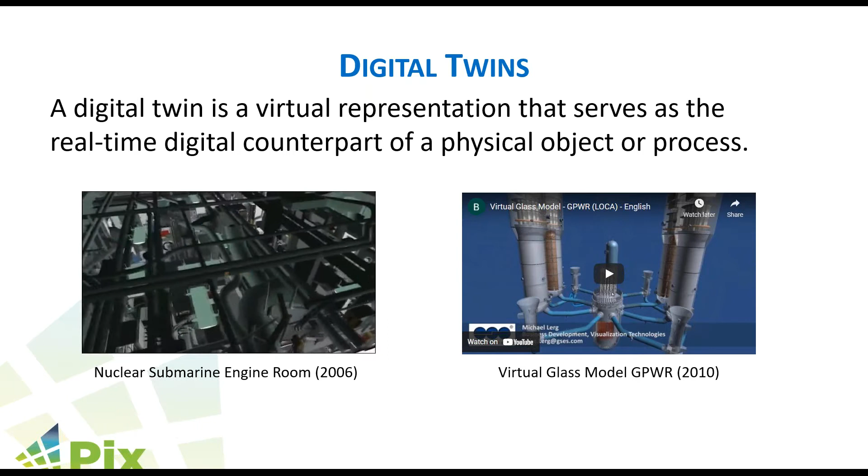Another aspect here is this glass model, called a glass model of a nuclear reactor. So you have the reactor core in the center and what's called 4 steam generators are these columns. These are the temperature gradients along the path coming from the steam generator, creating the steam that then goes to the electrical generation systems in another building, and then cooling off and going back to the reactor.

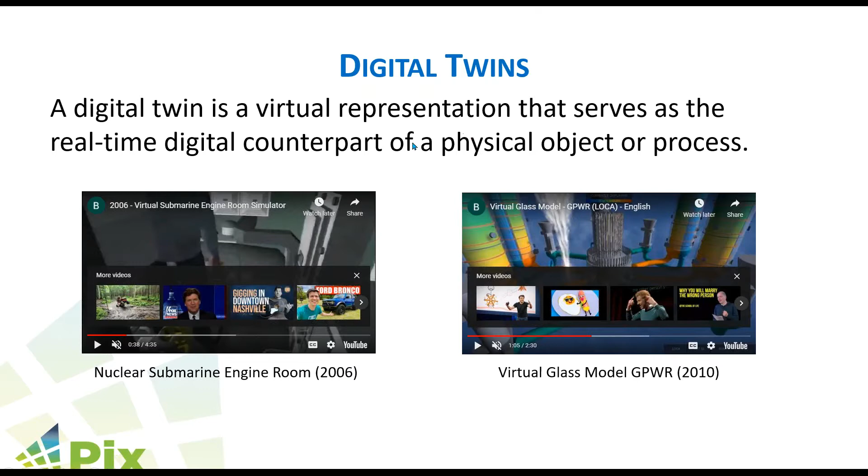We're able to trigger what's called a LOCA, loss of coolant accident, where steam is leaking out of a major pipe, and the temperature gradients were responding in real time, so you could actually visualize what was happening. But again, this is back in 2006, 2010. And although the term digital twin was coined back in the 60s and used by NASA for the Apollo missions and such, it really wasn't adopted by industries until more recently.

So we see that there are 4 stages of digital twins. The first 2 being collection and monitoring, with the digital twins representing a connection between the physical object and the data itself from the site and the sensors, for example, heating systems, thermostats, locks, lights, things like that. Monitoring then keeps track of that data by being able to visualize that data and see where problems occur within a building.

Further, taking it to the next step is doing simulation and optimizations. Once the data is collected, when you apply artificial intelligence or machine learning, especially within a 3D virtual model, we can then visualize how things are changing and do predictive analysis of where a system may fail down the road, given a history or trend. So you can actually predict when a certain system may have problems, either due to current data or historical data.

And then in terms of optimizations, we can also use simulations to make changes to real estate, doing design optimizations, eliminating factors causing deterioration, or changing energy intensive systems for more sustainable variants, and running what-if scenarios along those lines.

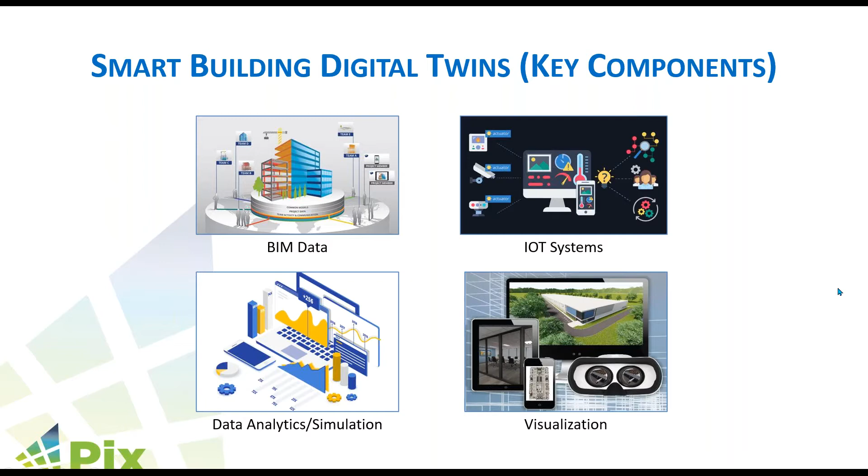Some of the benefits of digital twins for the commercial real estate market tie into optimization of the design and development process, doing what-if scenarios, getting through design and approval, getting permits, and things like that. There's increased data visualization to speed up decision making, reduced maintenance costs which is one of eProperty Care's strengths, access to maintenance logs and procedures, and increased tenant satisfaction by getting to problems more quickly, which reduces maintenance time and costs.

It optimizes property and asset management, especially if you have multiple buildings and multiple digital twins. You can then see how something affecting one building may eventually impact other buildings, especially if they're similar buildings on the same site, making the building more suitable to the tenants and the community at large.

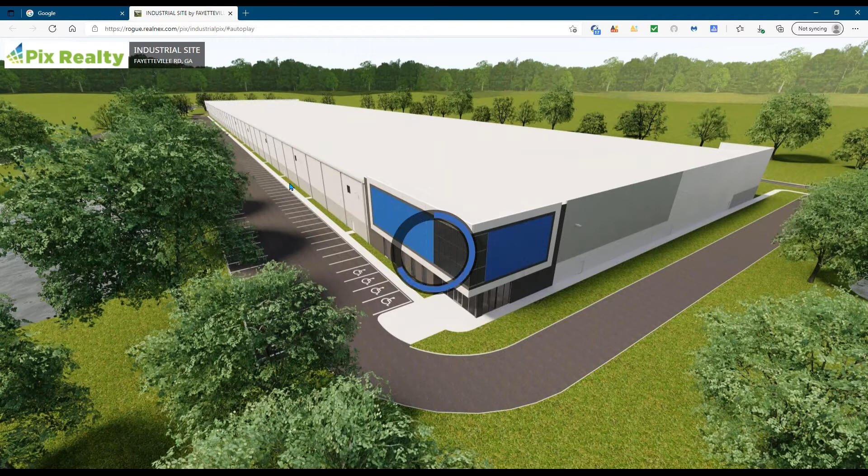So in this particular example of a digital twin used for design and visualization, we have...

Hey Mike, we're gonna have to mute something back there, there's some road noise I think. Yep, I just muted Charles temporarily. Gotcha.

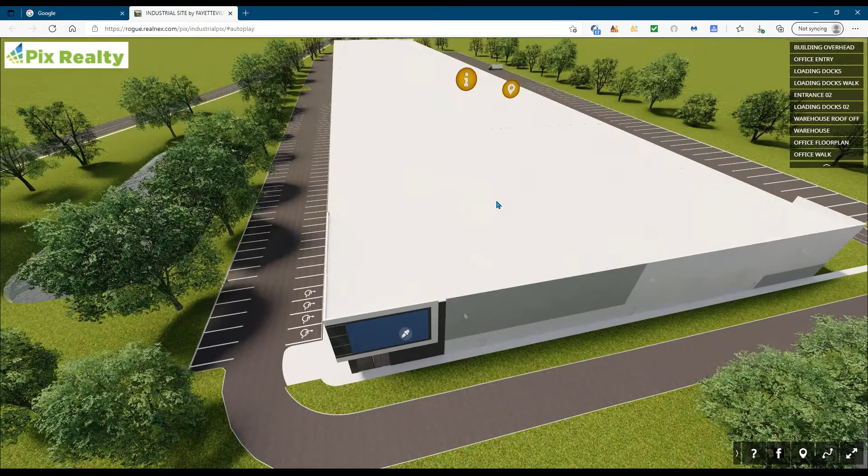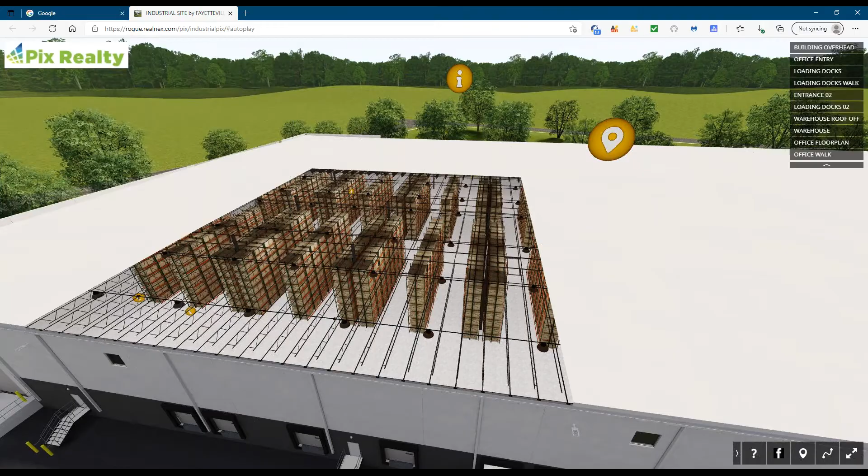So this is a 3D virtual reality model. It can be used with headsets, glasses, or a smartphone. With this we can explore various aspects of the building and get information. In this case we've unbranded it from our clients to keep things proprietary, but it went originally to their listing page for the property, their marketing page, as well as maps of the location, or we can drop into the building to learn more about it. So in this case, the building specifications can all be live data off of a website or a cloud service.

You can have availability, pricing, any live data that would be updated could be accessed through here easily. From a marketing standpoint for this property, the client had 4 days to present not only the building but the site - they wanted them to buy the site and build the building. So this is a conceptual design of the building that was built in 3 days for them to present to their client on day 4, and with that we were able to market...

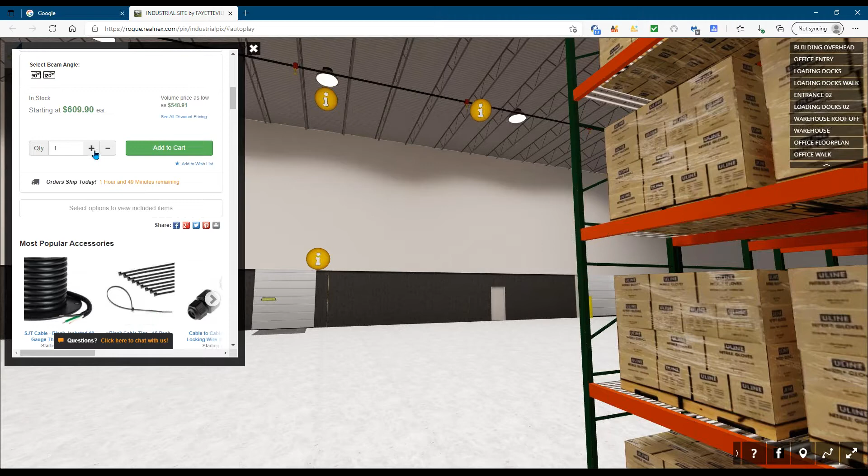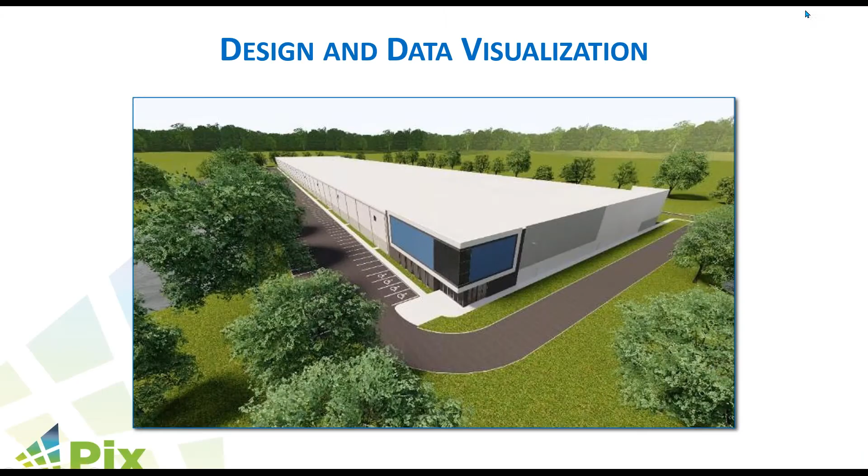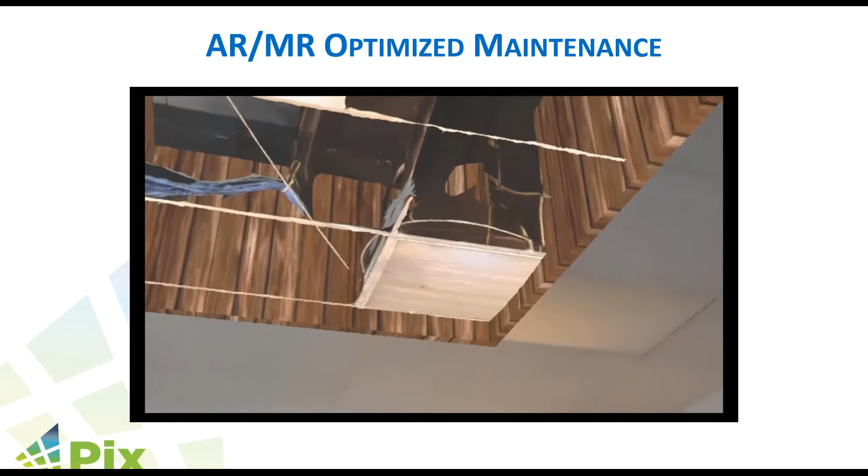This particular example is based upon using a HoloLens or mixed reality set of glasses. What this allows a technician to do is have an X-ray view looking into the ceiling. In advance of dropping in the ceiling tiles, they took spherical images and 3D data before the ceilings were put in, to see all the cable trays and runs. That way he can simply walk through, see through like an X-ray view, and figure out exactly which set of ceiling tiles need to be moved to access what he needs in the ceiling.

With BIM data associated within the 3D models that we create, we can do the same thing by being able to see what's inside of the walls or the floor below, basically providing you with an X-ray view of the 3D data in that space.

So in terms of eProperty Care, I'll let Jeff speak to this slide.

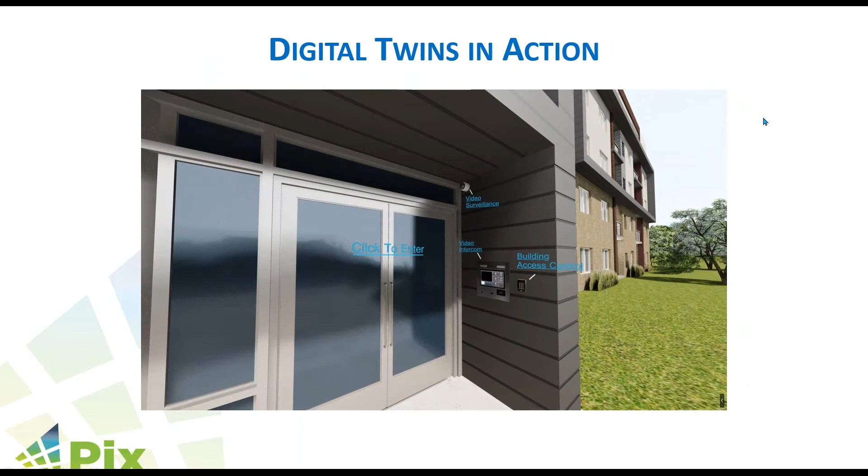So in this example, I'll load up the digital twin here for a building that we purposed for this. So this is a multifamily apartment complex. And one of the things we can do with the 3D virtual model is actually link to an interface.

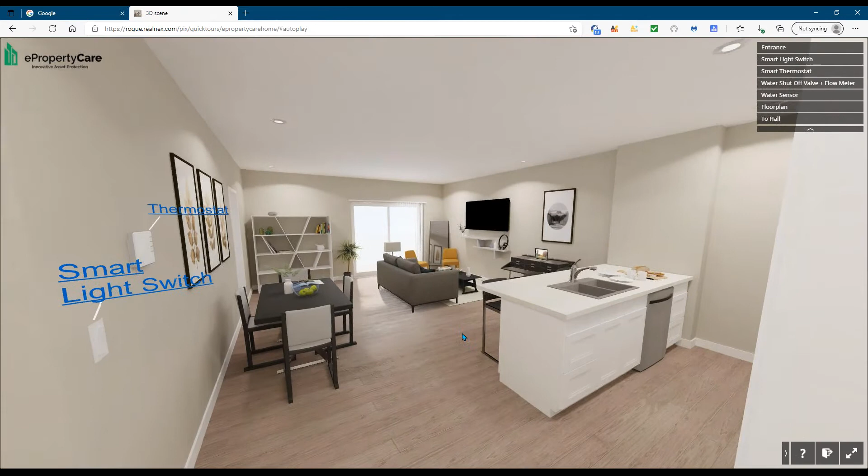So to start off with, we have a thermostat that is digitally controlled and tied to their system, within temperature sensors as well. The smart light switch, so it's again controllable for the user. They would have their own version of the app for the tenant, as well as the owner of the building. So if a unit was vacant, they could remotely control the lights and other controls within this unit.

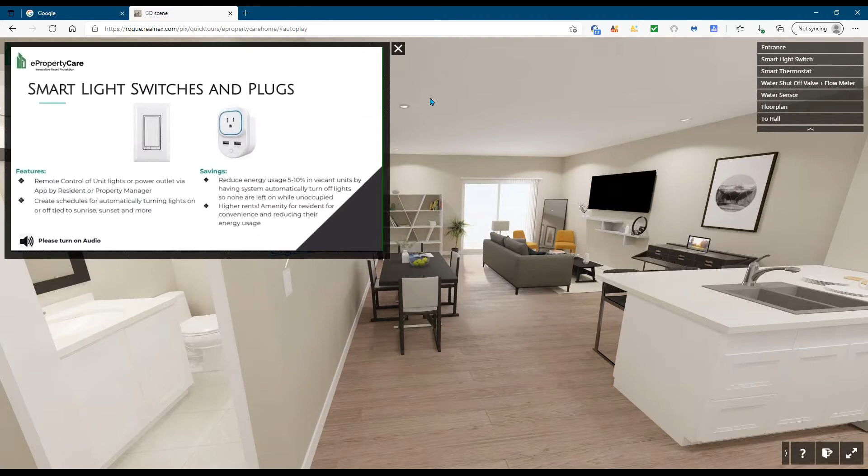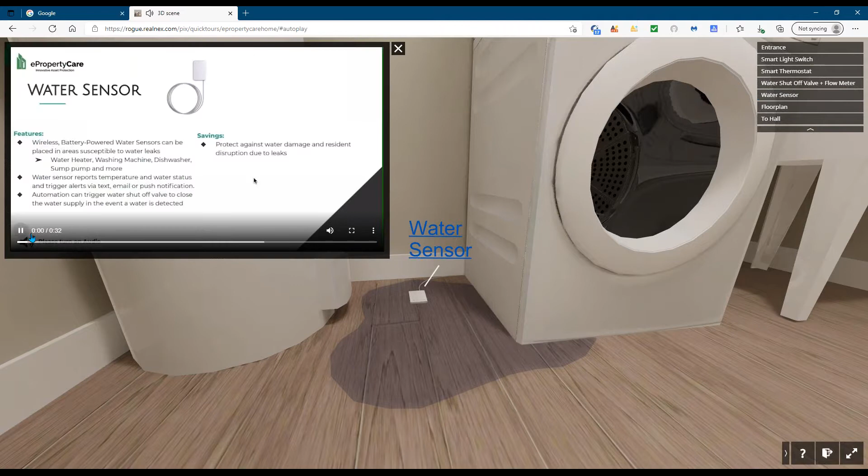And then, as Jeff was mentioning, the water sensor itself, there's a couple different water sensors. One is detecting the water itself coming from this washing machine or the hot water tank, and that would then set off an alert and could either cut off the valve for the apartment itself, which is in the other room we'll show in a second, as well as set up a caution or a warning to the building owner if the tenant is not available.

So this is an example of the water shutoff and flow meter. And so that again is controlled through Wi-Fi signals from the various sensors, and then also to the hub and out to the internet.

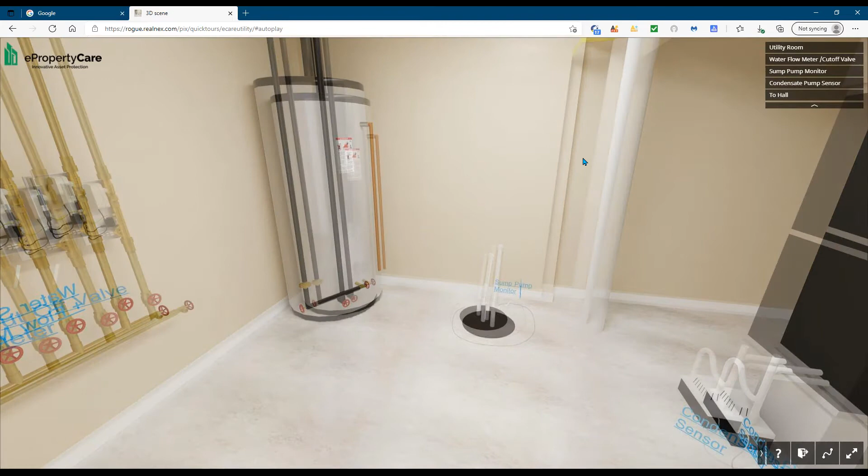So Mike, probably a good thing to touch on at this juncture is we're using this model, current state, also as a selling tool. So as we're engaging with new prospects that are interested in the solution, we're able to take them through this model, go to the various parts of the building, the exterior, the utility room, and so forth, so they have an understanding as to how the physical gear would get implemented on the property.

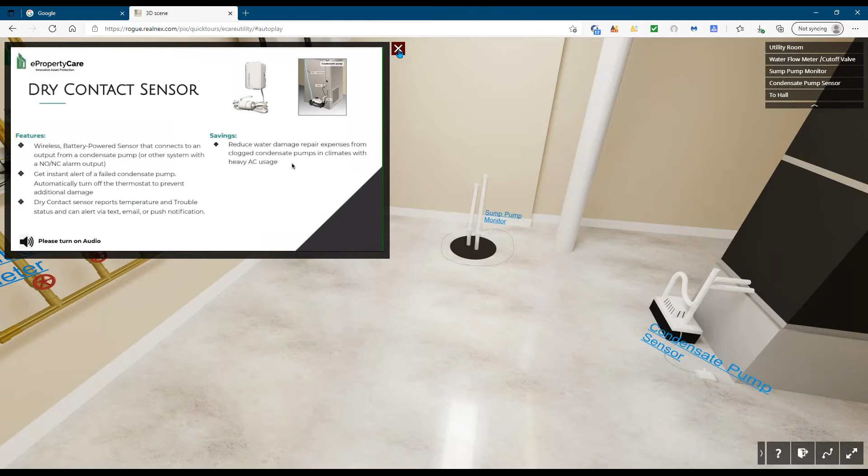So like, for example, here we have the dry contact sensor versus the other water sensor. The installation of the flow valves that would be on the water lines going to each of the floors, so you can cut it off either at the building, on a particular floor, or on a particular unit if fully implemented. That's correct. And we don't have it pictured yet, but there is cellular connectivity that all this works through. So a cellular hub is kind of the brain of our system, and all these devices communicate with that hub over the Z-Wave protocol.

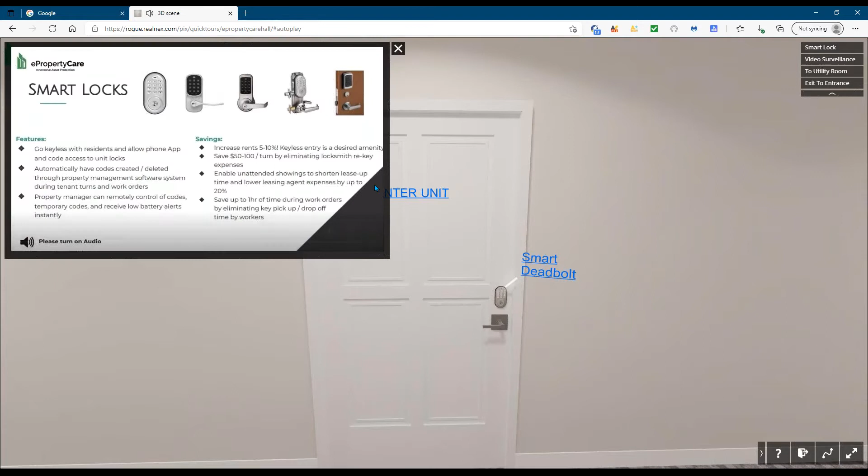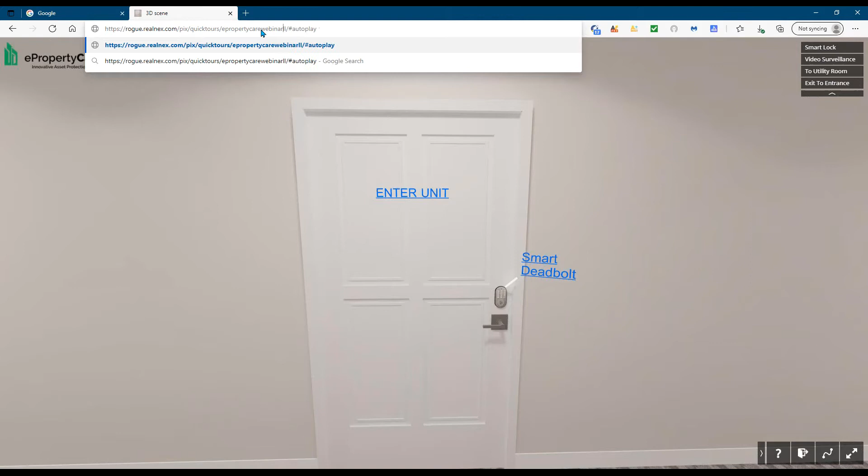Anything else you want to comment before moving on to the next slide?

I think just the notion that you're seeing a mixed use of the model. In certain cases, we're actually firing the application or showing how that can be integrated. In other cases, we're using the model as a training facility or a sales facility, helping someone understand the technology, like training a property manager about the different parts. For us, this has been a big game changer. As we engage with our clients, they're having a much better time understanding the solution and physically seeing how it would be implemented into their own property. It's been a great addition to our repertoire of things we present, and it's been very helpful to us.

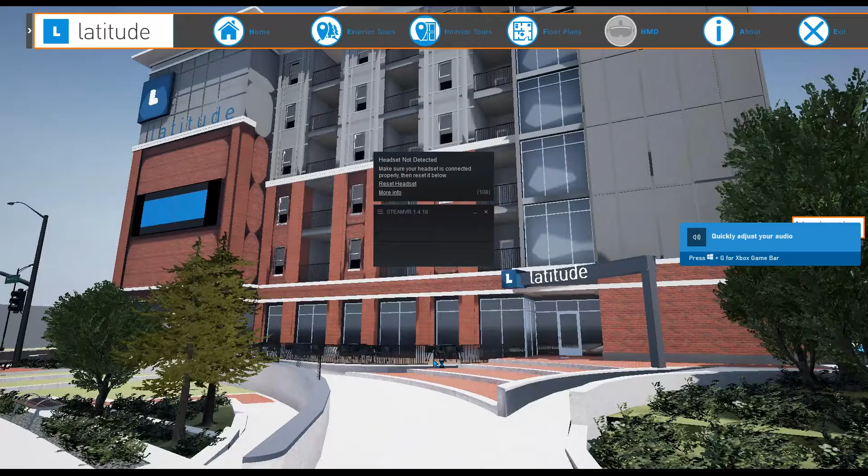In terms of pre-development, it's very effective to use for visualization, design decisions, and pre-construction capital raising and permit approvals.

I'll let... Christy, I believe you have control. I do not. Hold on here. There we go. Yeah, you should. Okay, I'm not sure why.

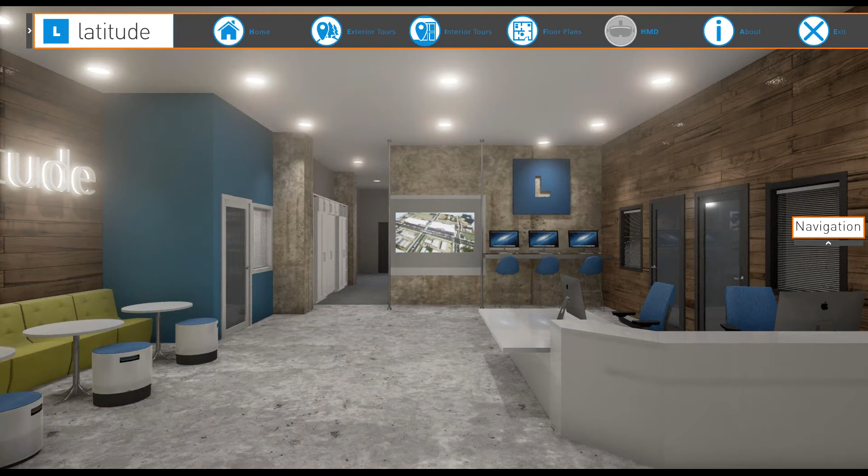In this particular case, we built this virtual student housing complex starting about a year prior to construction completion. They didn't have the ability to give virtual tours or actual physical walkthroughs of the student housing campus while it was being constructed. In addition, the client was still making decisions in terms of the interior design.

Both in this physical representation of the leasing office once the construction was done, as well as in the pre-leasing office that was off-site, they had a touch screen board with this application running. They had 3 computers with head-mounted displays, so the students, if they wanted, could put on an Oculus Rift and full head-mounted display to have a full virtual experience. Families could interact with the board, tour every room of the facility, all of the amenities, and get a full experience.

They achieved a 95% pre-lease rate on a per bed basis for hundreds of beds, prior to construction completion, which was 9% higher than they were expecting. I'll let Chris get into how the design visualization aspect helped them with the interior designers.

Think about this space in terms of, let's say all you've got is a floor plan, or maybe you've got some renderings of it. That's only going to get you so far. When we talk about a real-time visualization and digital twin, it serves multiple purposes, and it really helps you visualize a space, understand it, and do better planning up front.

In this case, when we look at this space in particular, it's a very eclectic looking area. This is obviously not your typical style of materials and furnishings that you would see in your average space. We were able to sit with the client while it was in the pre-development phase and go through and apply textures and change out materials, having them visualize what this would look like with those different materials, textures, and colors in place.

As an example, this wall here is a particular blue now, which is what they finalized on. We were able to take the Sherwin-Williams paint colors they were considering, apply them to the model, walk through the model, see it with those paint colors in place, and then help them make a decision along the way without having to go the route of making expensive renders or color comping. This was something we could sit with one person, they could share with the team, and we could go through and make multiple design decisions on the fly in real time, then have somebody walk through it.

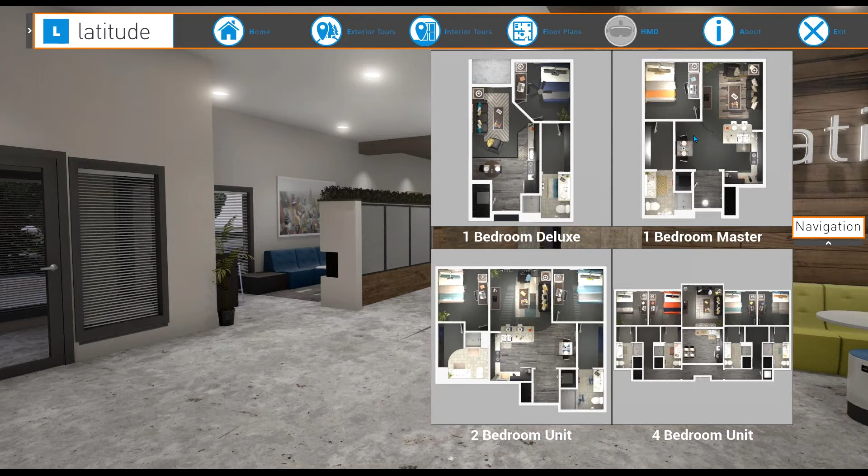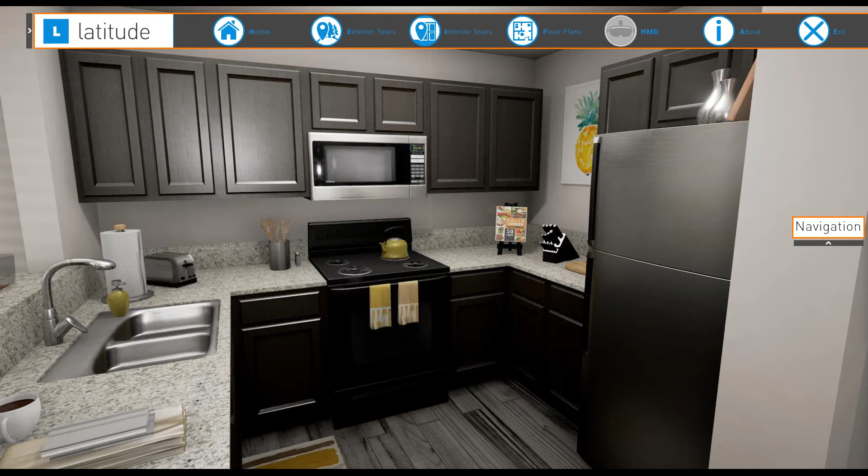Let's take a look at the one bedroom master. We'll click this floor plan, and that takes us up to this very photorealistic layout of the one bedroom master plan. As we look around, it'll be a little choppy because we're doing a screen share, but keep in mind this was built for a head mounted display, so putting on an Oculus Quest or a Vive and walking through the space with the headset on gives you the impression that you're actually in the space.

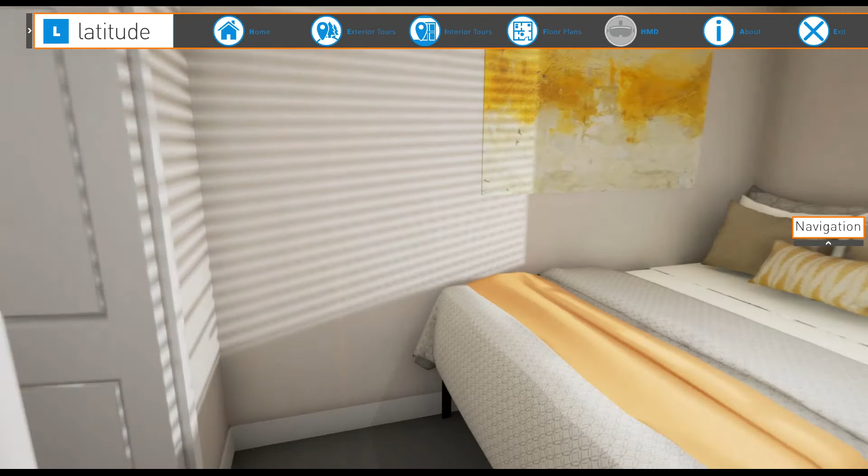It feels like you're really there, even before the space is built, which is what the client was looking for: a way to start leasing out these units before the space was built, without having to sit down with somebody and say, here are these drawings, here are some great renders, imagine what this looks like. Instead, we were able to put them into the digital twin virtually and say, here you go, take a walk around, take a look at how it's laid out, look at the size of the space.

We were actually able to furnish everything as well, so we staged it, and it has a very lived-in feel already. You're not just looking at an open floor plan, you're looking at something that feels alive and has the ability to give you a sense of presence when you're in it.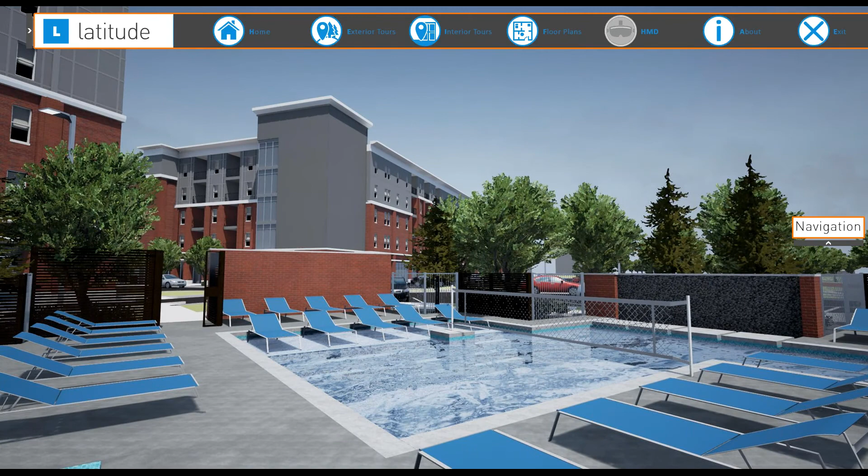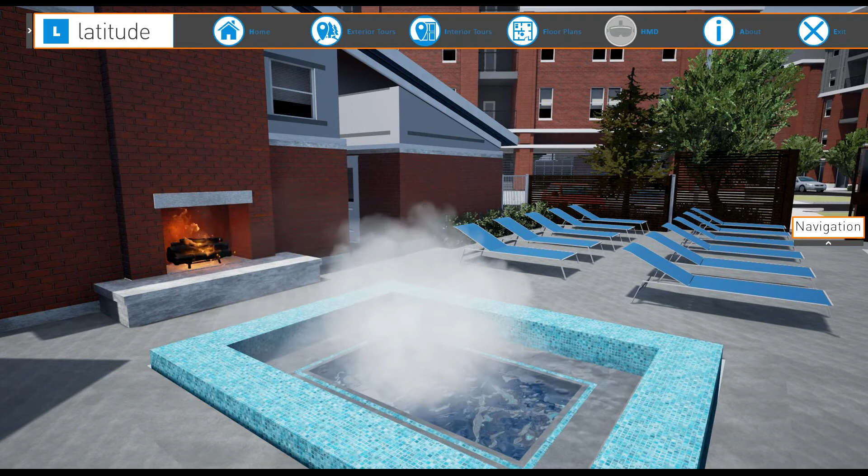And then finally, when we look at these things, they're all great, but when we come to the outside here and look at this pool area, you think to yourself, what's going to show this off the best way possible? You're trying to get these spaces leased, and you want somebody to understand how great this particular property is and what it has to offer.

We can show detail from as little as the steam coming off the hot tub to the fire in the fireplace, and recreate the water in the pool. Looking around here, you get a better understanding of exactly how this all ties together, how large it is, how open it is, how colorful it is, and how lively it is. We can experience it versus looking at something on a flat 2D render or an overhead site plan. It's not going to excite anybody.

To extend on that concept of design visualization, a lot of the staging items, furnishings, and amenities you saw in the rooms were picked off of supplier items available for purchase off the internet. The client, working with us, when we staged it virtually, provided renderings of those from our shots to the interior designers, who then matched about 90% of that.

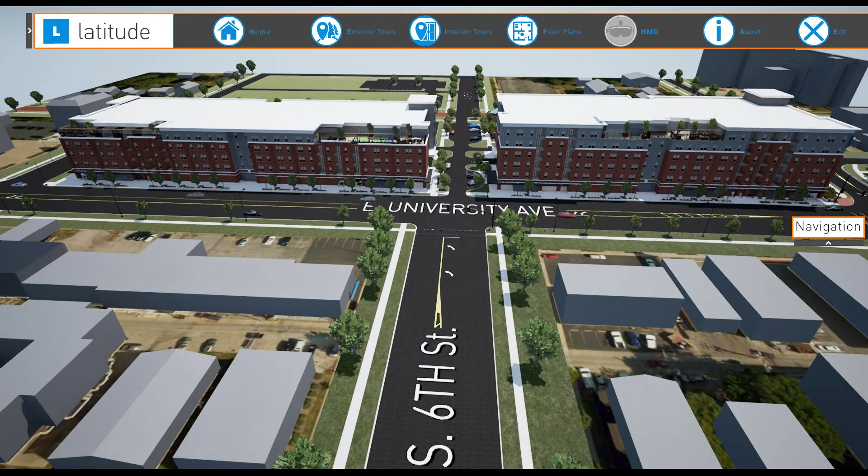So when the students moved in months later, a lot of them commented that it looked almost identical to how it did months or a year prior, when they were doing the leasing and exploring the virtual space before moving in.

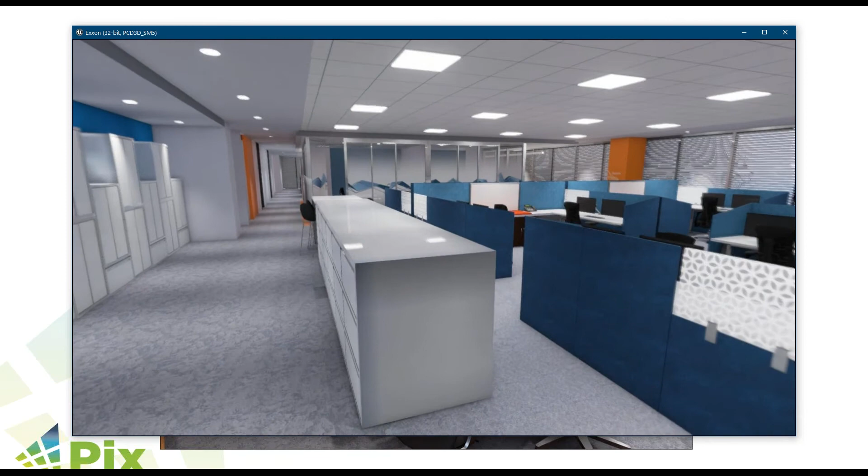Another example of ours is creating for Exxon a new headquarters facility. This helped expedite order changes by allowing people in different locations to see the variances between the design using a VR model and the actual space. That allowed the familiarization time for new employees relocating from multiple offices to this new regional headquarters to be expedited.

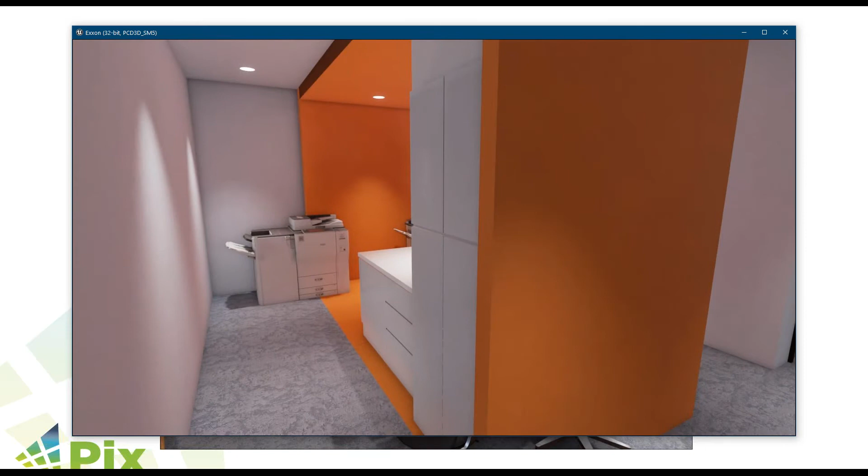It also eliminates, in terms of the previous demonstration, the need for a physical showroom or sales leasing office. As I mentioned, we've had 95 to 100% pre-lease or pre-sell rates using this technology. One client was actually able to pre-sell 70 to 80 units of a second phase condominium based upon the success of the first phase, while the second phase was under design. There wasn't even a finished design yet, and they'd already collected 70 to 80 units deposits on those units.

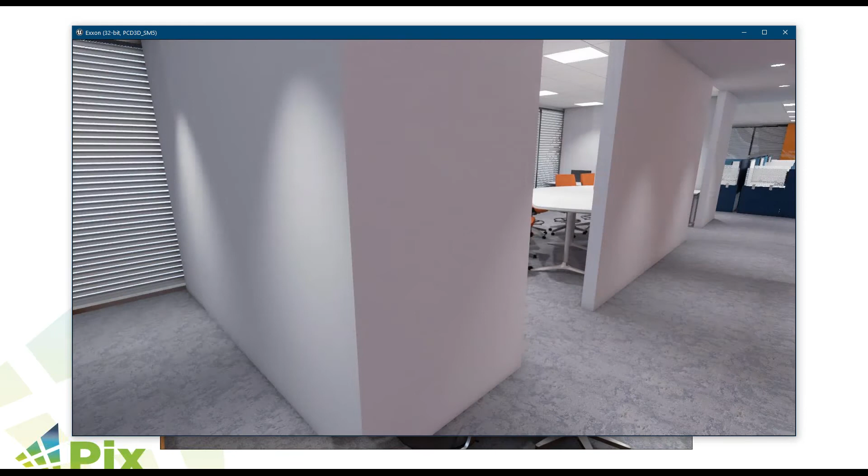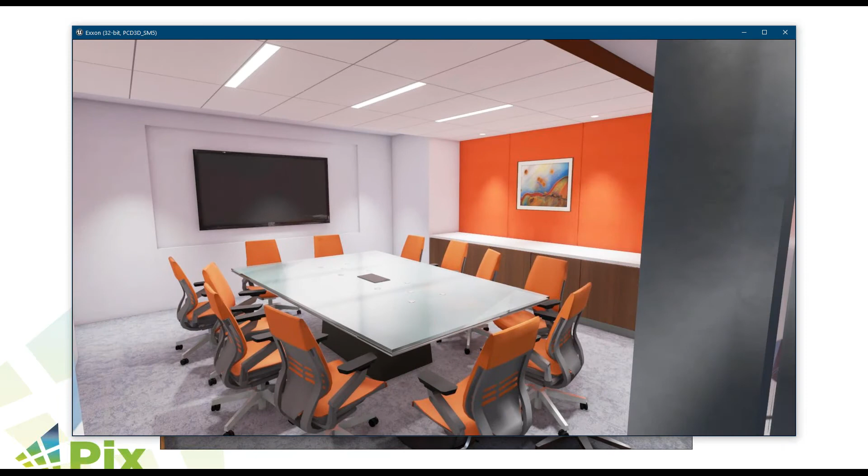In this case, the building is laid out in quadrants, so there's familiarization in terms of the different spaces. You can see each of the enclosed office types are for different purposes and named appropriately. This is one of their meet rooms, a medium-sized conference room, and there are different types of smaller rooms for single purpose or quiet rooms for studying. They wanted to educate their employees as to how each of these spaces were intended to be used.

And we could even show you where the bathrooms are, the most important part of the building. Take you right there.

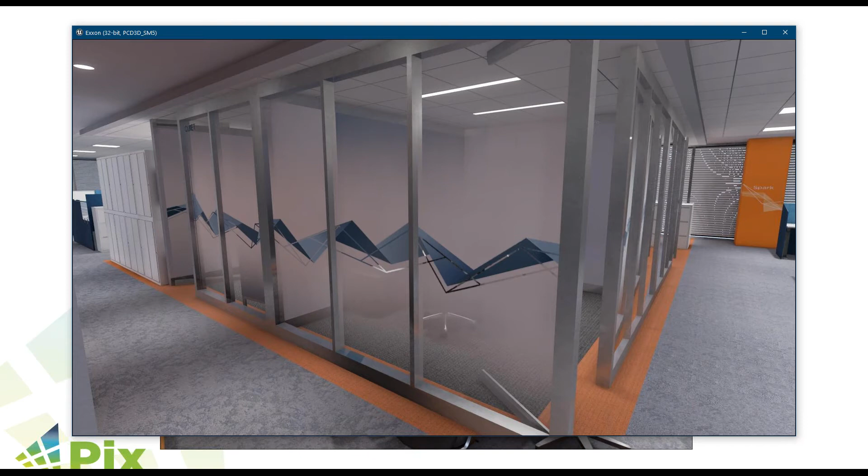The other thing I'd like to point out here is, in terms of visual style and what we can achieve with a digital twin, this glass here was very particular, and they wanted to display this building as closely as possible to what the finalized design would be. So we're able to take these patterns they had picked out for the glass and the rug. This rug is very particular, it's not your typical one-style rug, it actually looks almost like an ocean shore coming in. But we're able to replicate many of these complex designs and bring them to life in the environment to make somebody feel as if they're really there.

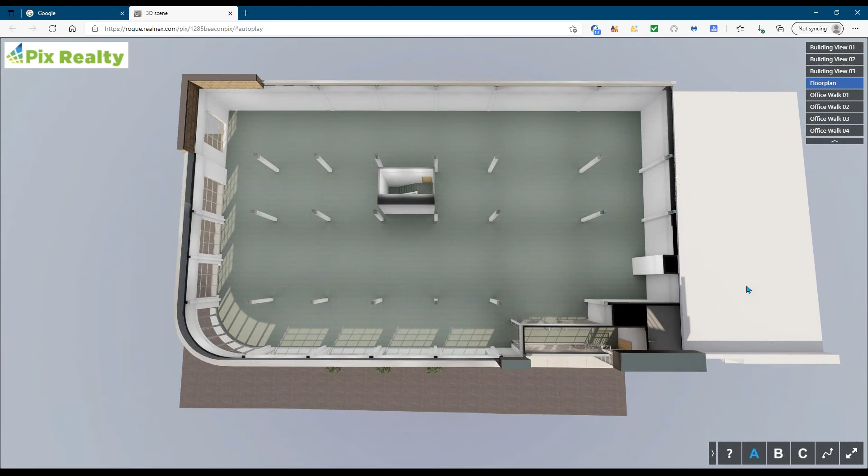In this next case for finished properties, this particular building was originally 12,000 square feet on the second floor and was a gym pre-COVID. The client, the broker for this property, wanted to show it to three different target audiences. The first being a retail space, which we showed as a completely vacant space with just the structural elements, so they could see the maximum capabilities of using the space. The second is a medical clinic, which I'll let Chris take over from here.

So while this loads up, I want to get past one misconception folks might have about a digital twin, that it's a large file, or that it requires special hardware. That's not the case. As you can see, we're running this inside a web browser, so it works on any device, from your phone to your tablet, to Apple, Windows, or Linux-based computers. It doesn't matter what the web browser is either. We have full freedom of accessing a digital twin no matter what your needs are, and how light or heavy and detailed it needs to be, like we showed in the previous examples.

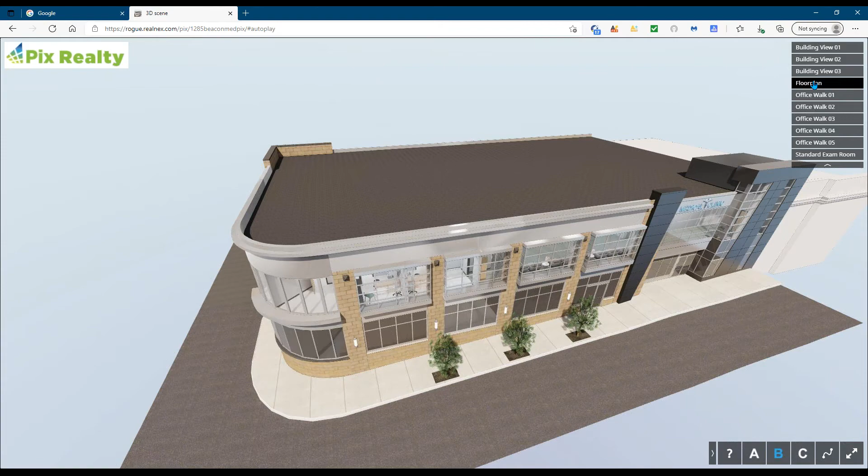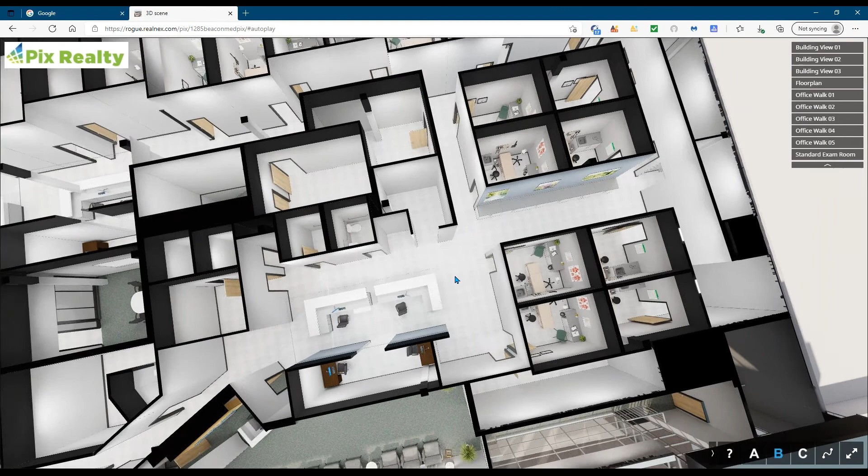As Mike showed earlier, we had the empty layout of the building with nothing but the structural elements in place. Now we're coming over to this medical office. As we do a deeper dive, we can see where each of the examination rooms are in this design, and where the nurses' stations are. We can even take a look over here and see there's a waiting room with a video playing on the television screen.

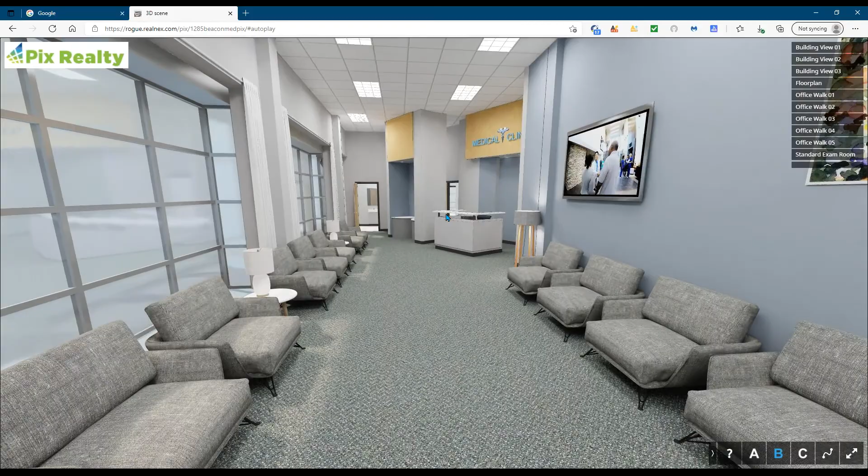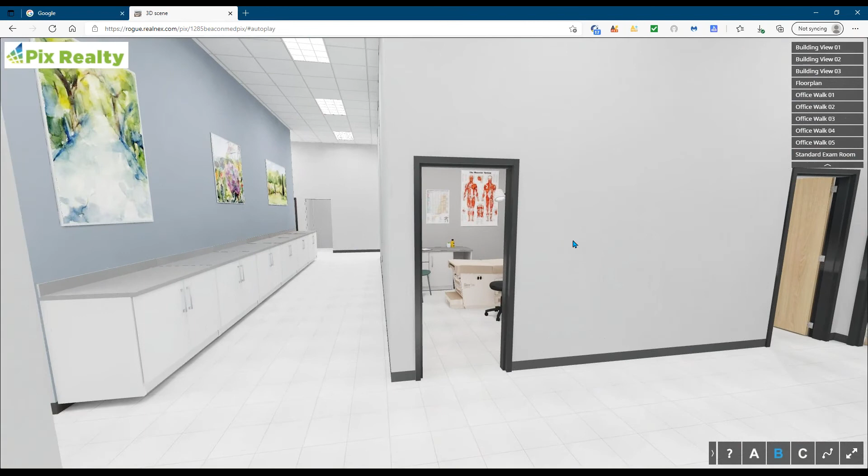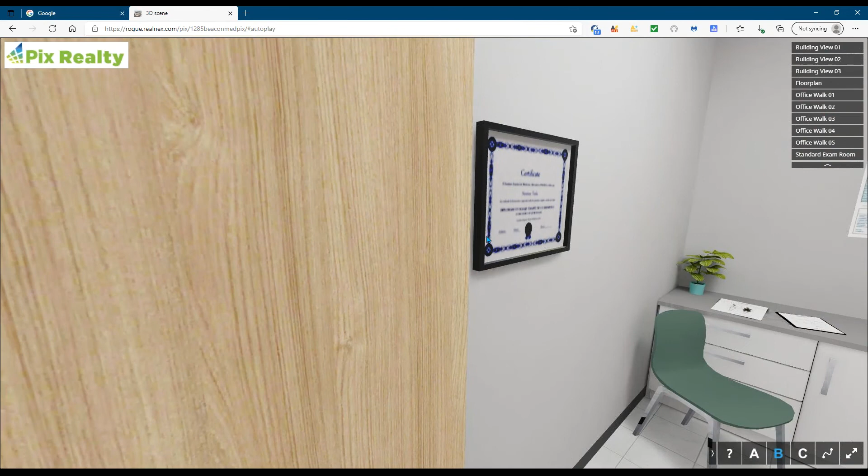But ultimately, while it's great to see everything overhead, the best part is being able to walk through and do a full virtual tour of the space. We can start from the waiting room, come right up to the receptionist area, enter the space, and do a full walk tour of the entire floor. Then we can jump back and forth—if we want to see the floor plan again, we can go back up to it. This gives you a great understanding of what it's like walking from the initial entry point to any other area inside the model.

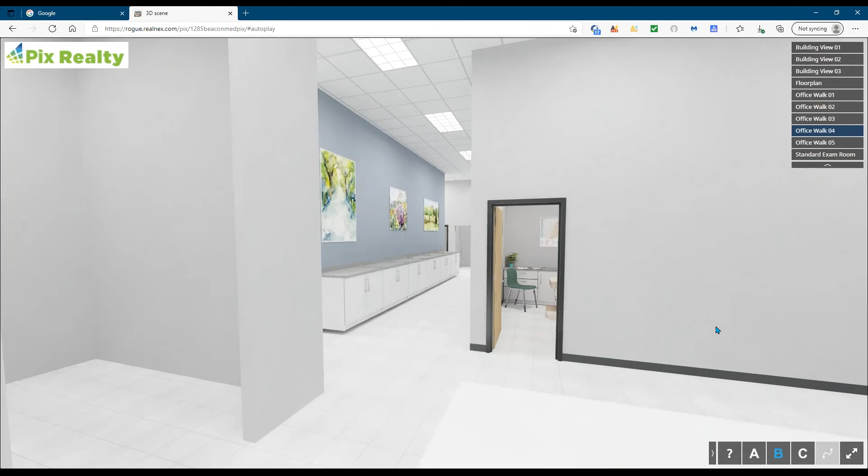The other nice thing about these digital twins is that we can give you a full automated tour of the space. We can hit one button, and if you're giving a presentation or sharing this with someone not very comfortable with the technology, you just tell them to hit one button and they'll get a full tour of the space automatically, which is a nice feature to have.

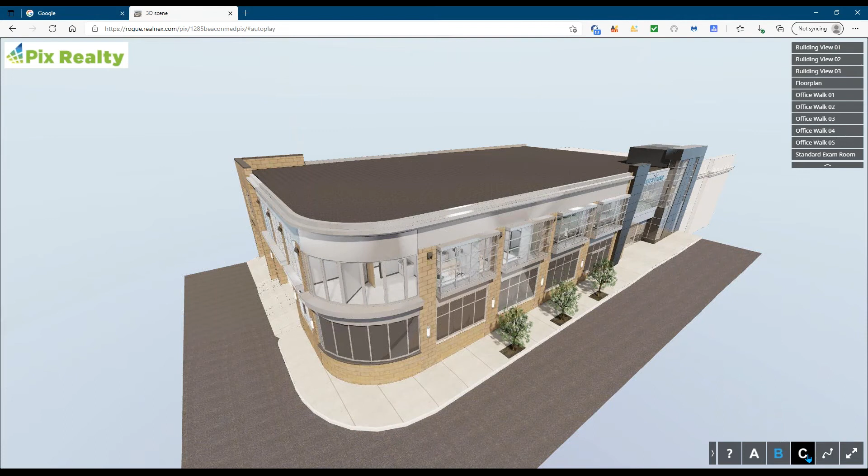And then finally, as this comes back out, we're going to come over to the office. Let's take a look at what this exact same space would look like converted for a high tech office instead of a medical clinic.

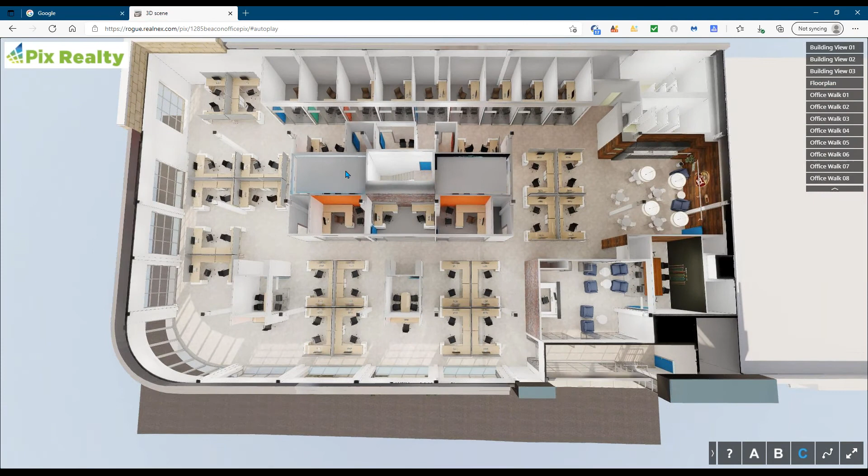Okay, take the roof off. We can look down at the floor plan view, zoom in, and pan around. Right off the bat, we can see just how different this is. We've got a core here set up for desks and a meeting area. We've got offices in the background, and then an open plan here with a bunch of desks and cubicles sitting around it.

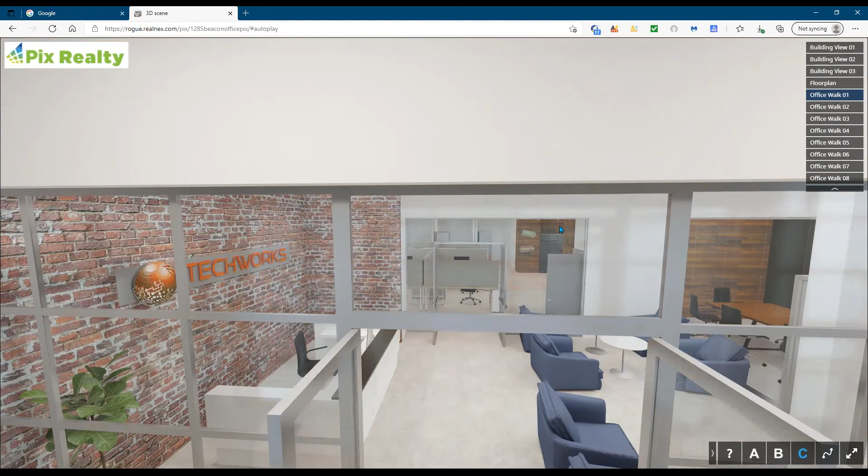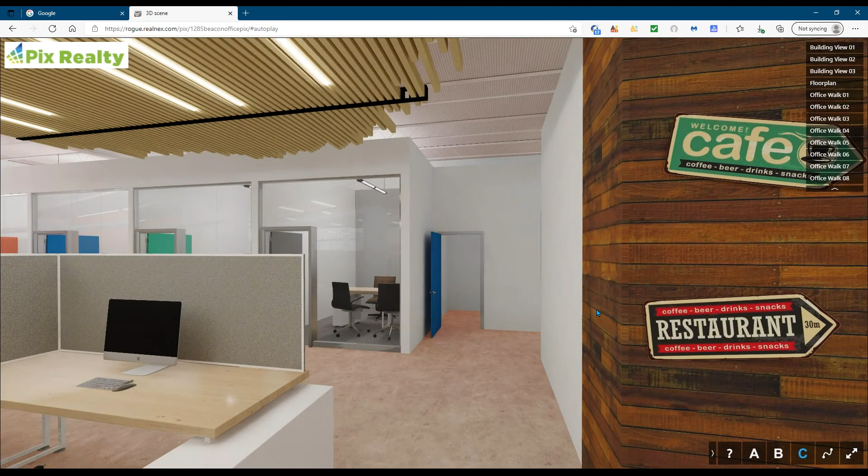Let's jump right in. We'll come down to the receptionist area. Immediately, from the previous walkthrough, we get a really solid understanding of the differences between the two floor plans of each of these digital twins. Very different, same space, very different feel, very different flow, very different sense of use and scale.

And all this running inside of a web browser.

In terms of digital twins, there's a growing discussion that digital twins can mean a lot of different things to different people. We've taken a more comprehensive approach to account for the basics of digital twins and BIM data through the capture and integration of operational data. But in addition, we construct our models for purpose beyond digital twins, which delivers value across the entire life cycle of the building to meet a range of investors' needs.

And this includes driving ESG initiatives. They can also capture the cost savings associated with digital twins from an operational standpoint, but also drive revenue from the same model, which increases the return on investment for both the model and the building.